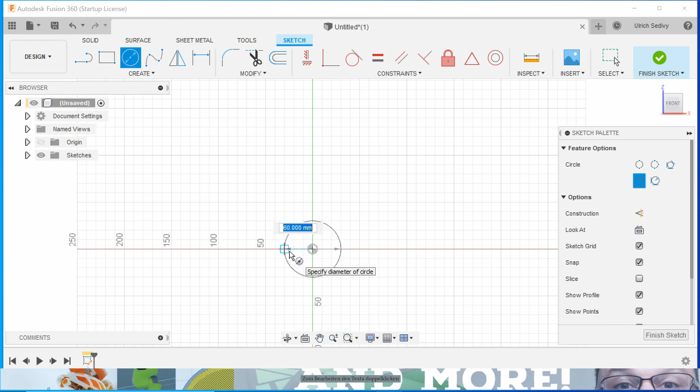So hi guys, let's start with our first step, and that will be to create a movable axis with a snap connection. For this we're gonna start with a sketch, and we just need a circle, and let's make it 50 millimeters in diameter. And that's all.

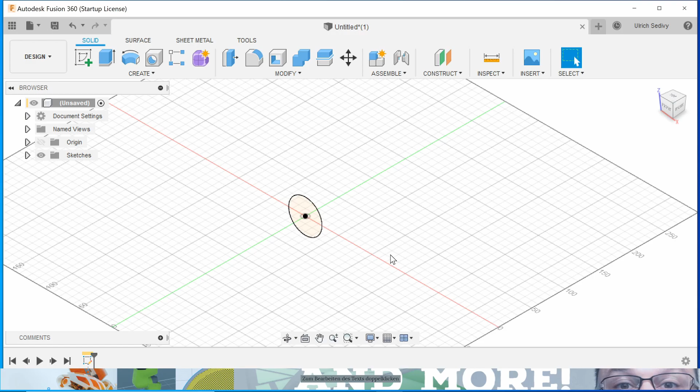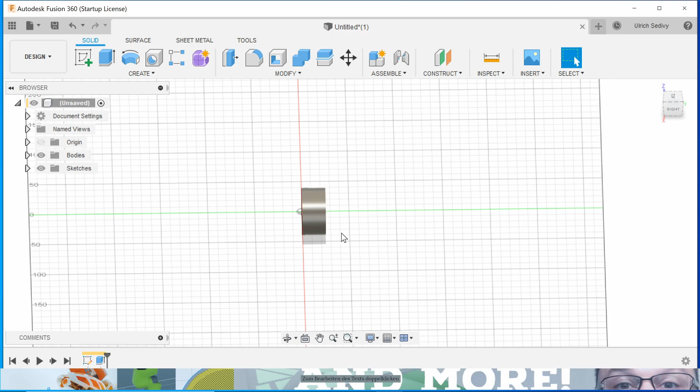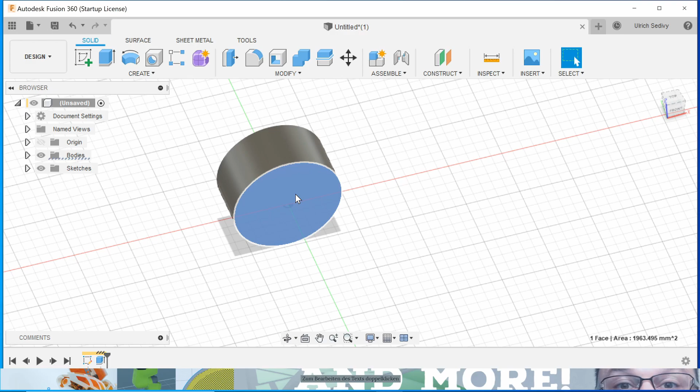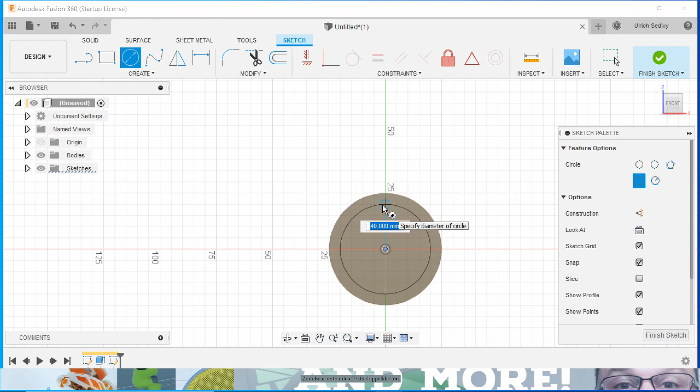And then we're gonna repeat working on this side and create another sketch, which will be also a circle, and I would say, yeah, we have like 5 millimeters, make it 40.

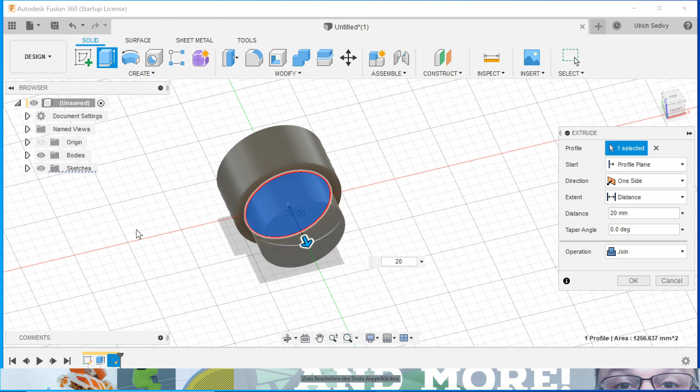Finish. And then we're gonna extrude this one, not to 25, I would say to 22. Let's do 20. Press OK. And then we have 25, so we have 45.

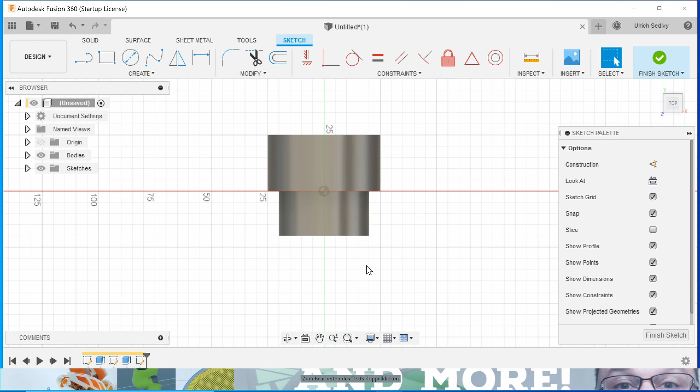So we're gonna do the next sketch in this perspective, and we need a hookup for the snap connection. Let's check. We're probably gonna need like 3 millimeters, and then we're gonna have 30 degrees for the snap. It's kind of a best practice.

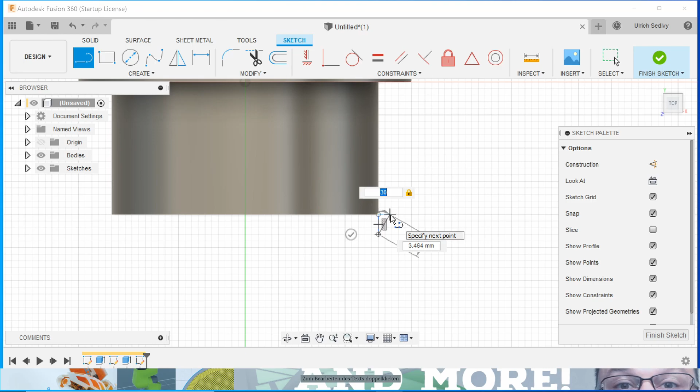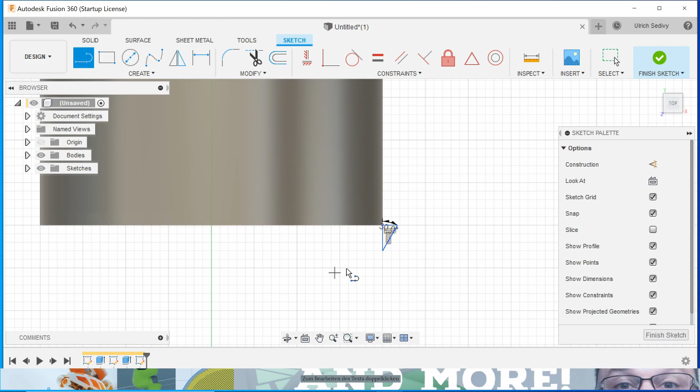Let's check the size. Looks not so bad. So in general we have to go back about triple the size. So if we have 3 millimeters length, we're gonna go back 10 millimeters. And let's zoom a little bit out, and then we're gonna close the whole thing.

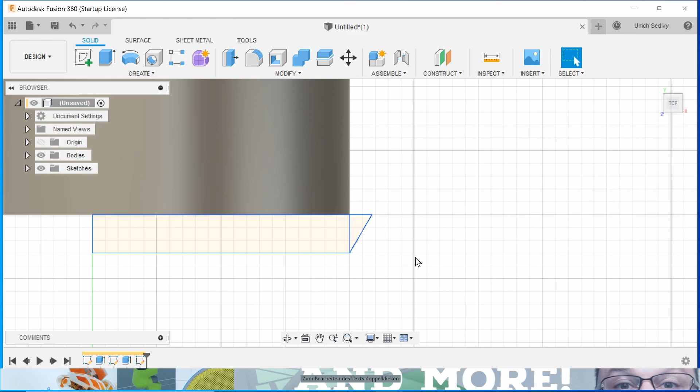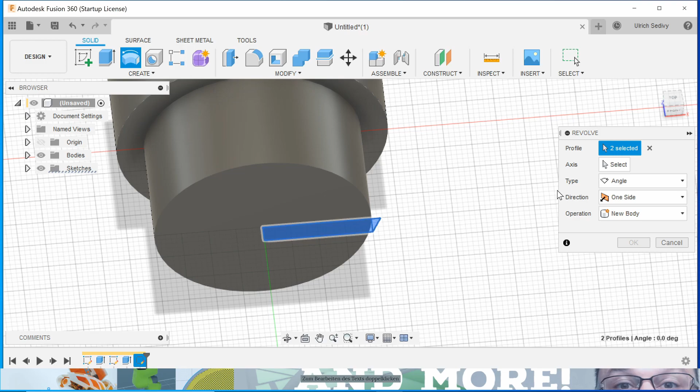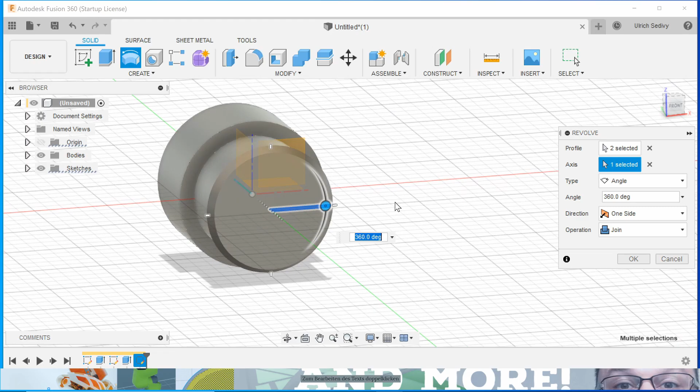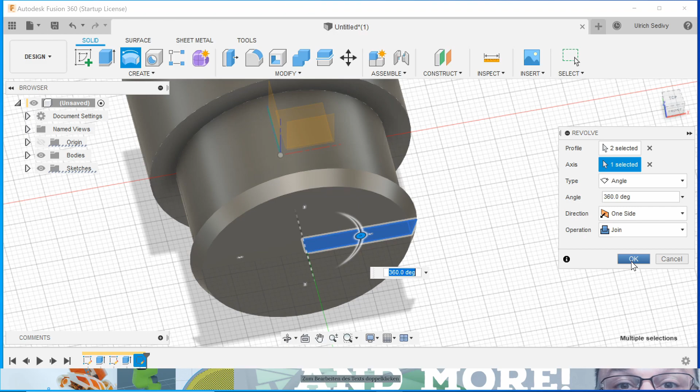And that's basically all we need to do. And yes, we want a join. Still working on one side. Confirm, and there we are. Okay. We have the hookup for the snap connection. Check.

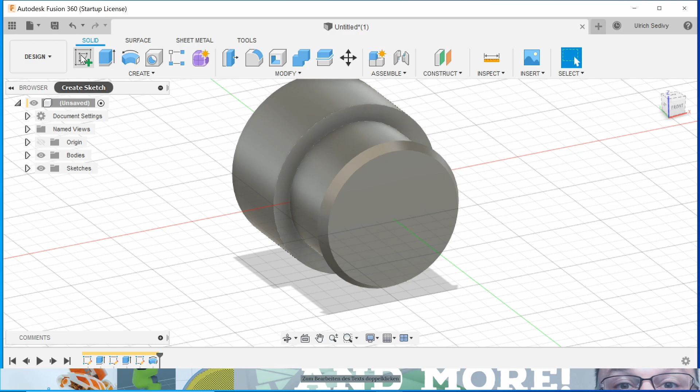Next thing would be that we have to do the cutouts from here. We can already create the shape, but we're not gonna do the cutout yet. The reason is we want to create the opposite side with a technique called Boolean operation. But you're gonna see it later. So first let us create just the shapes for the cutouts.

And it will be like this. So don't be afraid. They can be not too big. It can occur that it is too small. So in general, I would say keep double the thickness of the snap hook itself. Okay, we're gonna make it like 2 millimeters. So yeah, like this.

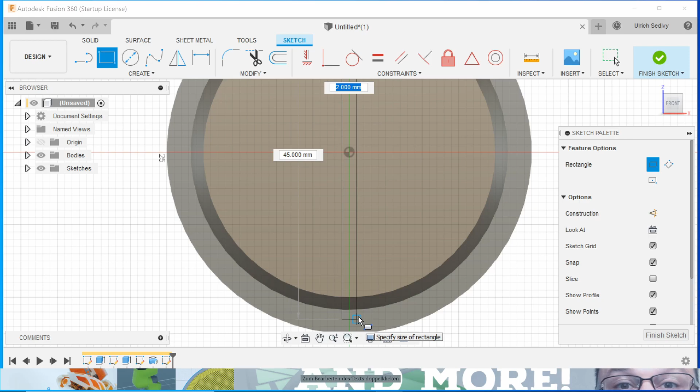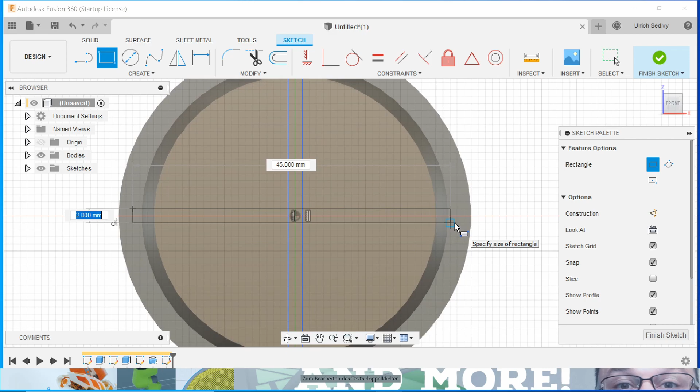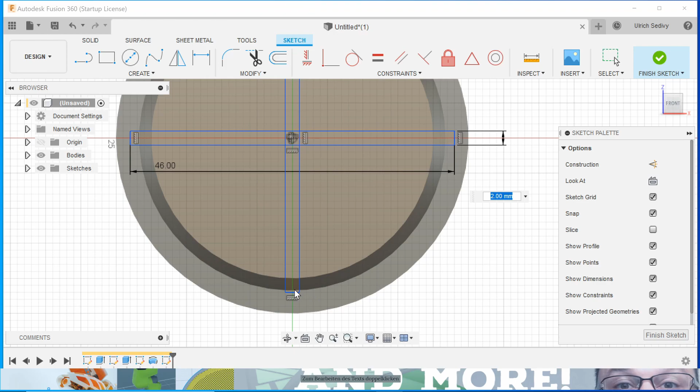Let's make it 4. Okay, wait a second, let's make the other one, and then I'm gonna show you how to change those dimensions. This is one of the tips I want to give you. So how to change a dimension? First we have to add the dimensions, what I'm currently doing. We have 2 and 46. Always have to confirm it. And the same thing here.

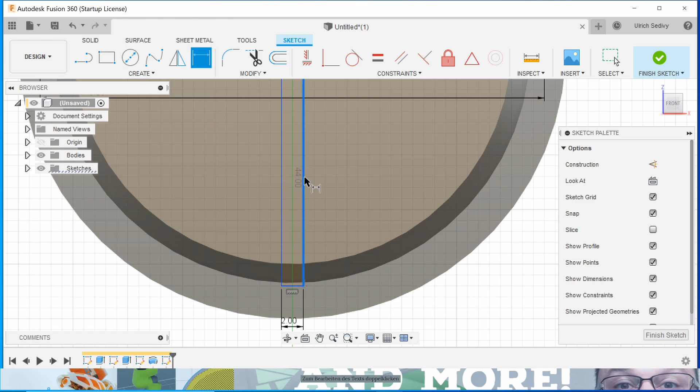So okay. We need to add the dimensions. We have also 2 millimeters, and then again this side. Oh, come on. Okay.

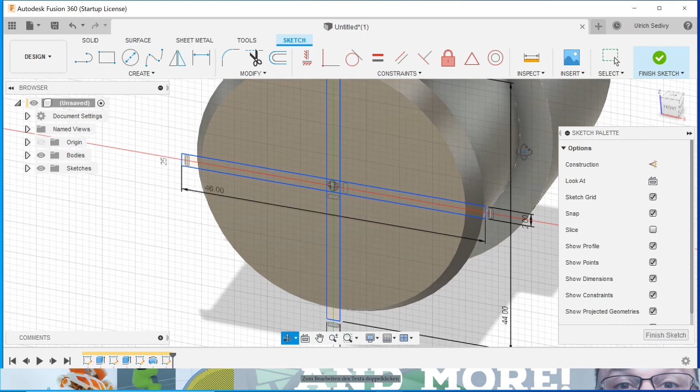By the way, if you wanna move in the current view, like I just did, just press the middle mouse button, and then you can move your view around. Currently it is the ZX plane. If you want to turn it, just do the same thing while pressing shift, and then you can turn the angle, or you can also call it the camera view.

Okay, let's go back to the front view. I was not 100% happy with the 2 millimeters. Let's change it. You can easily change it now by double clicking the value, and we're gonna change it to 4. Enter, and it will be 4. The only thing is it is not centered anymore, so we can maybe connect the whole thing and just move it.

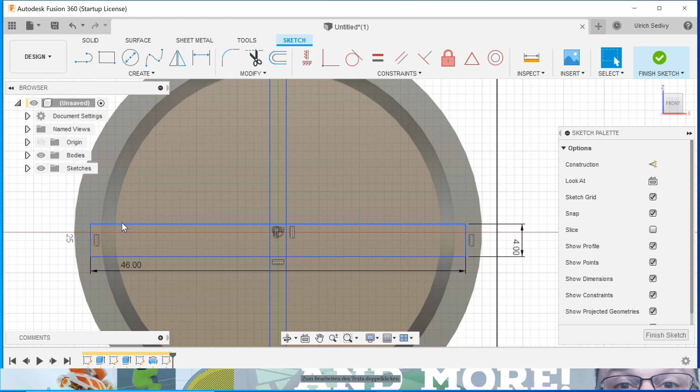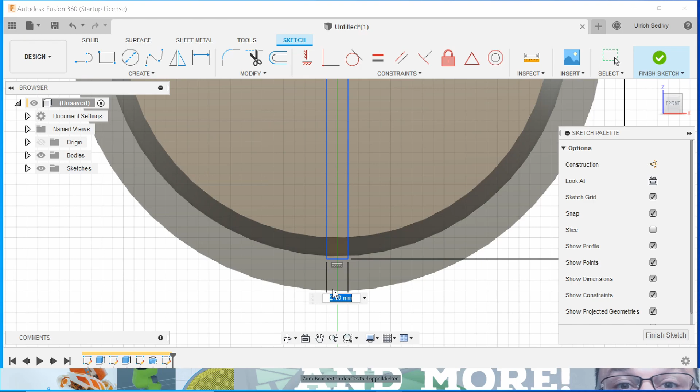It's not really snapping, but we don't need to be super precise on that. Same thing here, double click on the value, change it to 4. I can just take this and do some kind of repositioning.

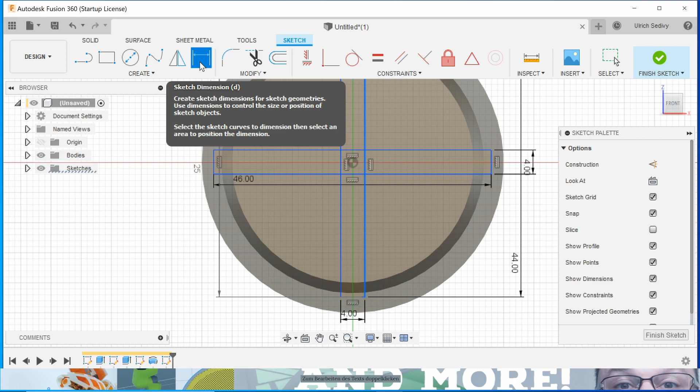If you want to have the exact position, for those of you who say, hey, dude, what is this? It's a kind of art thing. You're working with CAD programs, so you want to be precise. We can do this too, no problem with that. So let's select our dimension tool, which we can also select by pressing D. If you hover over the functions, some of the functions have a shortcut. So in this case, we have D for dimension in a sketch.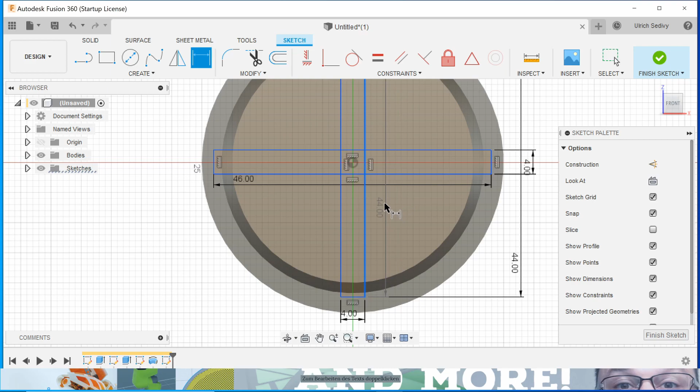Okay, so the shortcuts are also depending on what kind of layer and what kind of tab you are in. In this case we are in the sketch, so there we have the D for dimensioning. So in this case we're just gonna create a dimension from this to this edge, and we can see it was like 2 point whatever. Let's do it again. 2 point, and then we're gonna pull it out. 2.9. We're gonna change it to 2, and we're exactly in the middle.

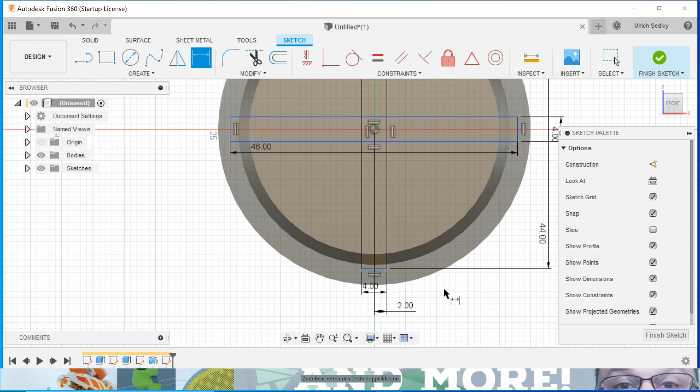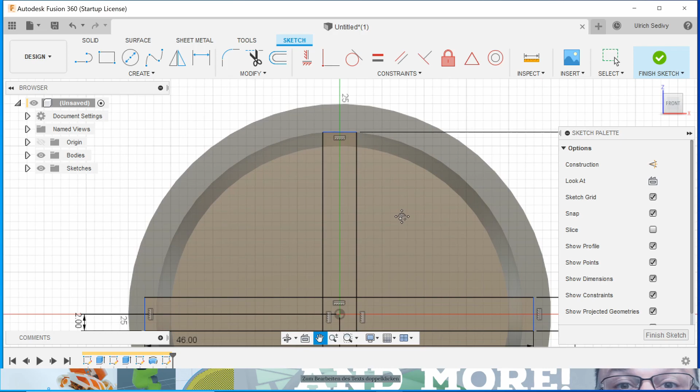We can do this again for this guy and the midpoint, and we can also change it to 2, and we are exactly in the middle. So now we are super precise. Okay, let's finish the sketch here. Yeah, it looks kinda off. We have one that is too short, 44. One is 46. Let's change this one also to 46.

And so now we can slide it just in one of the three dimensions, which has no dimensions, and this is just the z-axis. Okay, so we have all our overlaps for the cutting later, and let's finish the sketch.

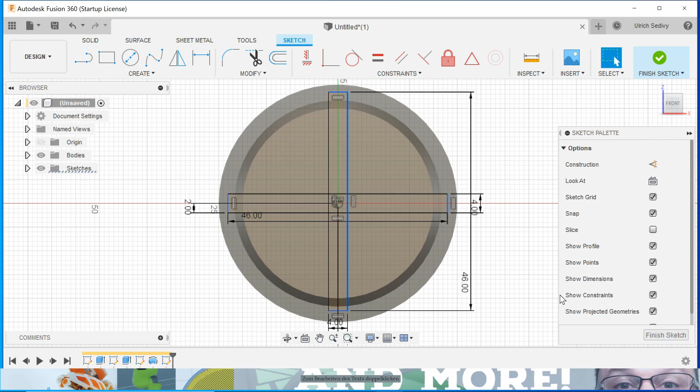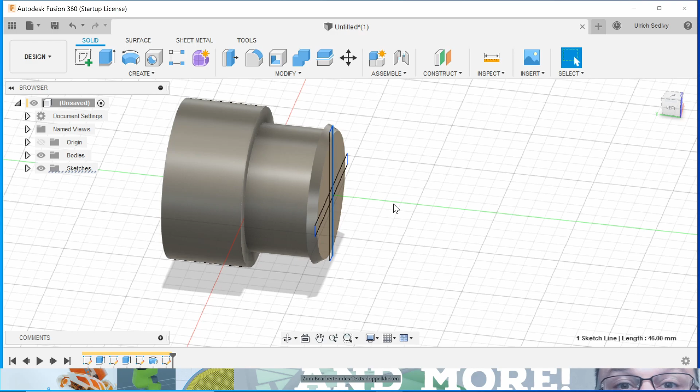Okay, so let's go back to what I said before, that we have to create the other body. So this is clearly the male side of the axis, and we're gonna need to create the female side, and we're gonna create it with this Boolean operation I told you guys about. So how can we create a Boolean operation? Good question. Next question. We need first a body.

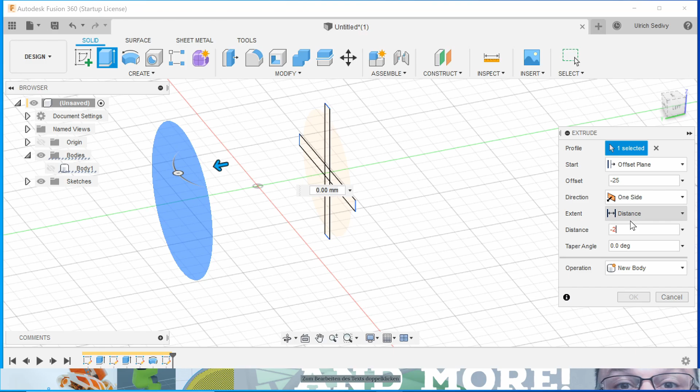So we're gonna create a body from this side, and I'm just opening the bodies so you can see we're creating another one, and I need to hide this guy. So I'm gonna do an extrusion from a different plane, like an offset plane, and we already know it is -25, and we're gonna extrude to -2, and there we have the opposite side.

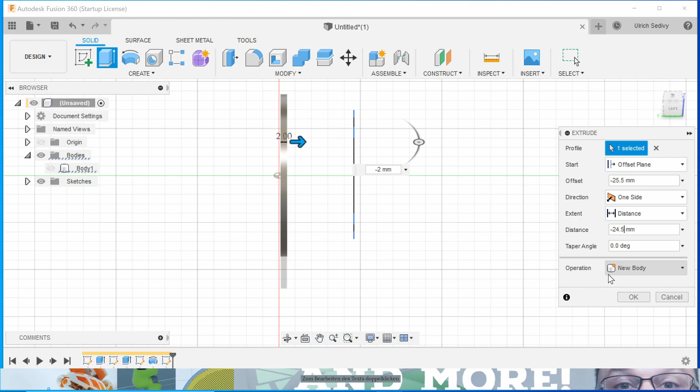The only thing I would add is a little bit of space in between the axes. So we're gonna add 0.5 on this side and make this side 0.5 smaller. So we are keeping the 50 millimeters in complete dimension of this axis. Okay.

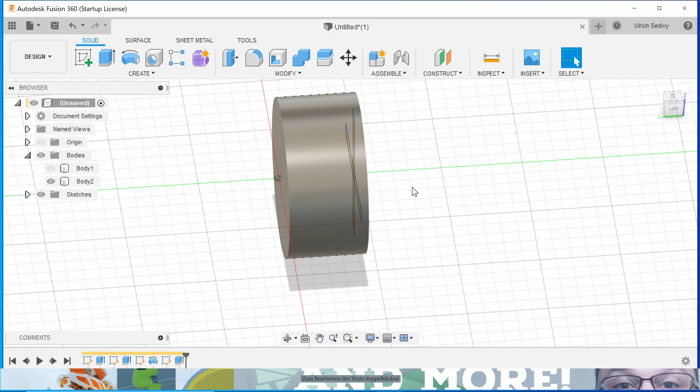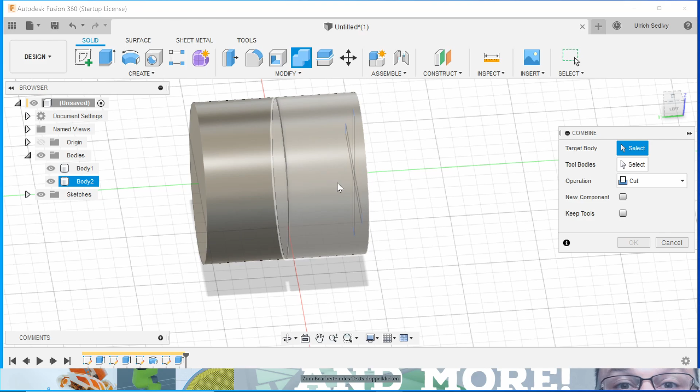So now we have the counterpart, or you can also call it the female part of the movable axis, and we need to do the Boolean operation. It is called combine, but we are not doing a combination. We're gonna do a cut, and this will be the object we want to cut. So this is the target body, and then we need a tool body, which is this one.

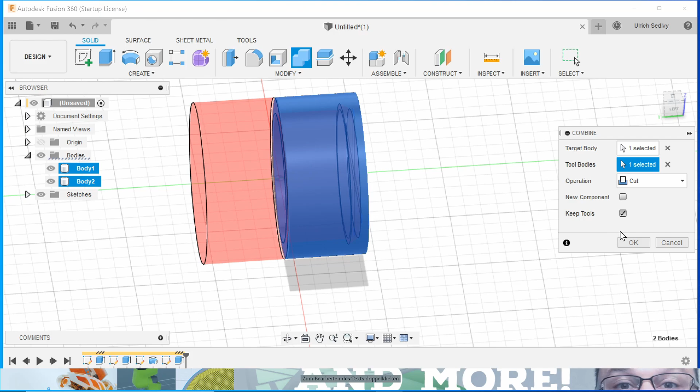Very important, if we just confirm it now, it will eradicate our first body. So we need to keep the tool body. If you want to keep both bodies, you can create a new component, but this is not what I want to do now. So just confirm it. And what happened? We're going to check it. So second body. Obviously it didn't cut.

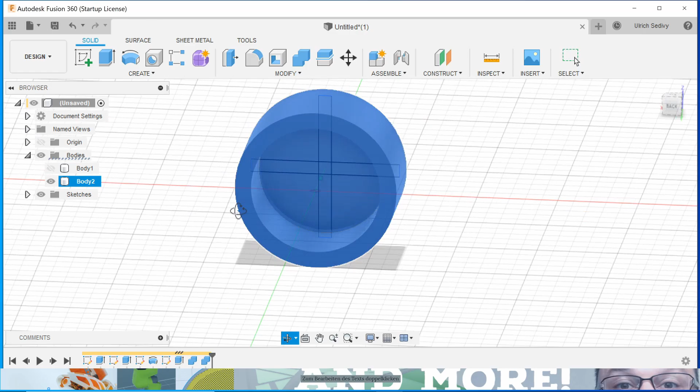So let's do it again. Select the tool body, make a cut and keep the tool. So let's hide this body and we should see it, yeah. It was done before too. Sometimes you don't see it.

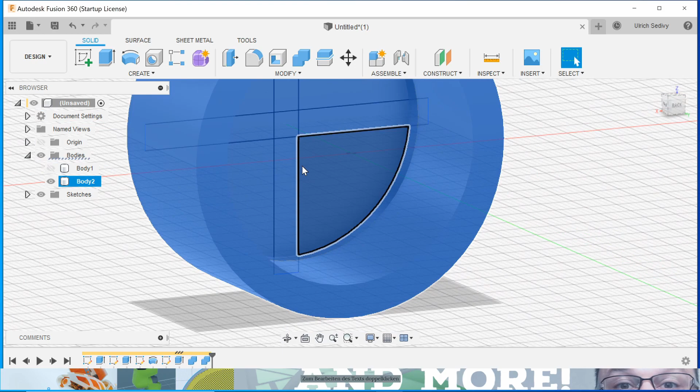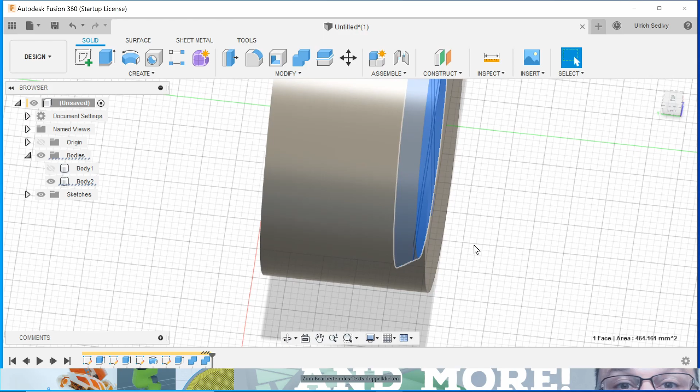So the reason why we did not do the whole through cut was that we want to have a round shape here, a complete round curve, which is now selected inside. You can see it. It is the whole shape, and now we can turn to basically every angle without having issues. Okay, so let's swap to this one, and we finally need to cut through.

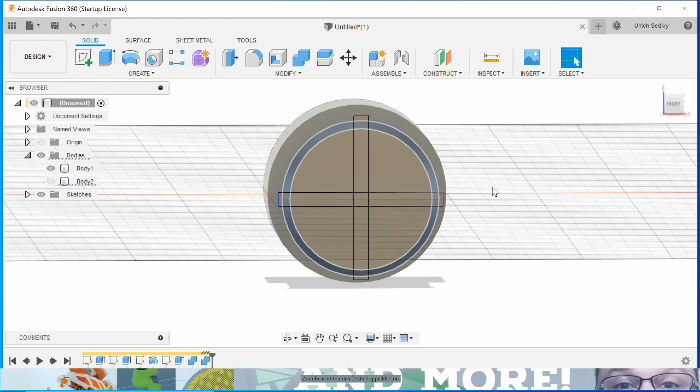The other thing which is missing is that we need another circle on this sketch, because we're gonna cut everything through if we select this, and this is not what we want to do, and otherwise this whole thing will be too big. So

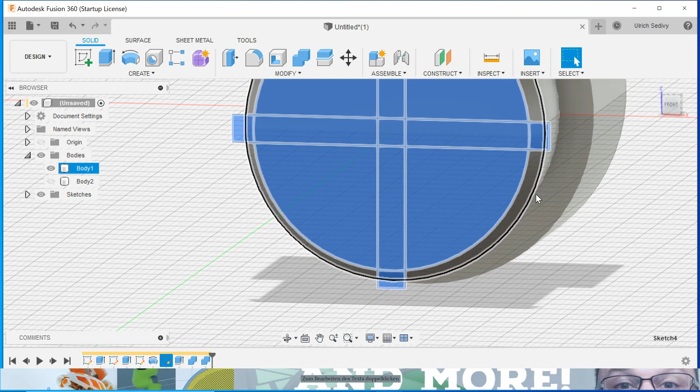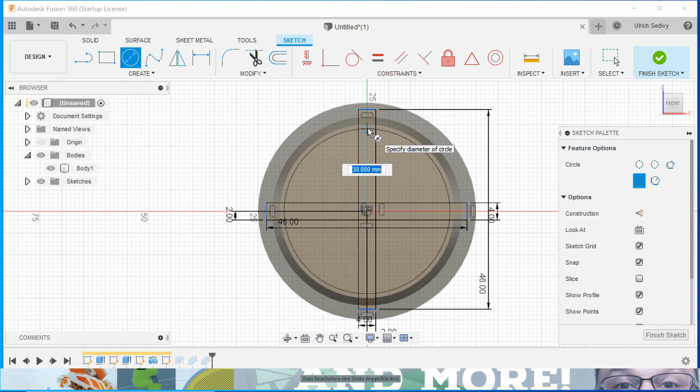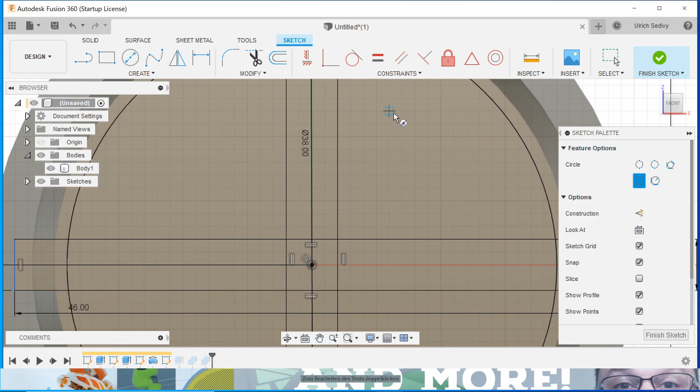let's edit this sketch and just add a circle with the dimension, let's say something like this, 34, what is it, 40, so 38 was looking good, 38. You can just type it in, 38, and we automatically have the dimension in this case.

Okay, now we have everything to do the cutout, and that's the right time to do this cutout. And how we do it: pressing E again, select all the stuff we want to cut through.

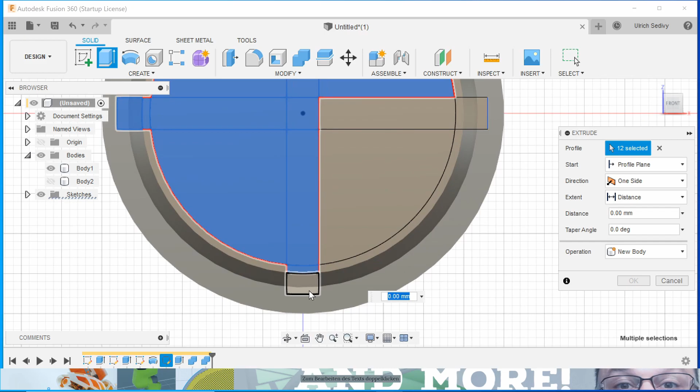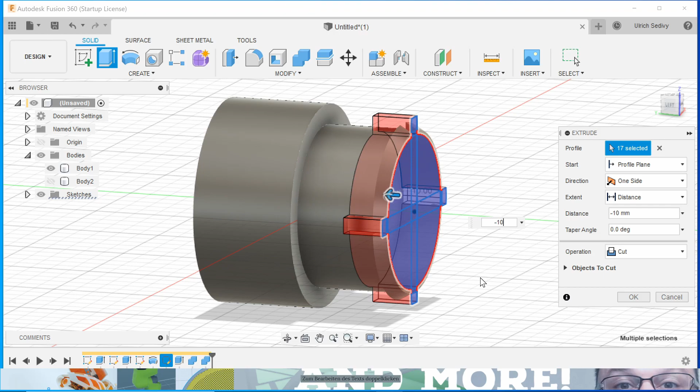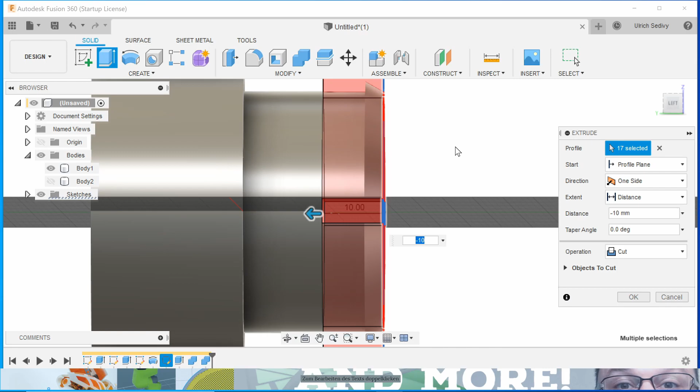Okay, everything is selected, and let's do just what we said, -10, and look for it, something like this. As we said, it should be enough, like triple size of it. Okay, you're gonna be fine.

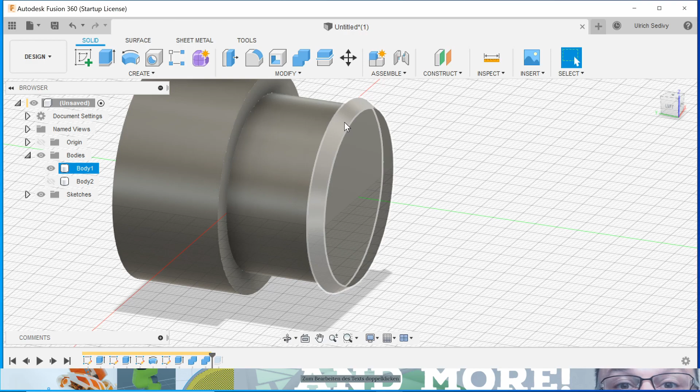Let's go one step back. So, as you can see, I always love to work with this timeline, because in case you forgot something, you can just switch back and edit. So I'm gonna edit, I call it a beveled curve. I want to bevel this curve and the other curve too, because this will be too tiny and risky to break.

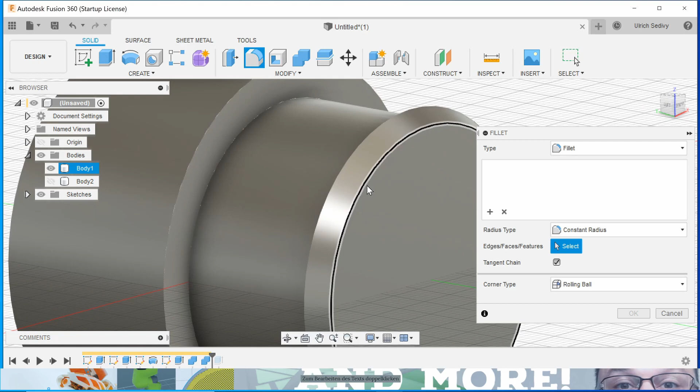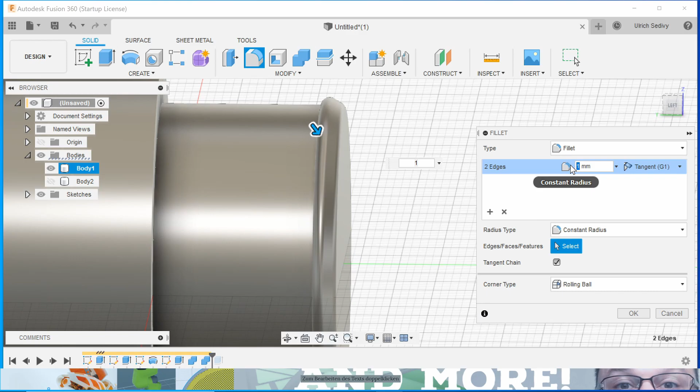So for this we're gonna select the fillet tool for beveling edges. We can select both and just put in 1mm. What we got now? So we got something like this. I would say 0.5 is the right one we are looking for. That's okay. Let's do this.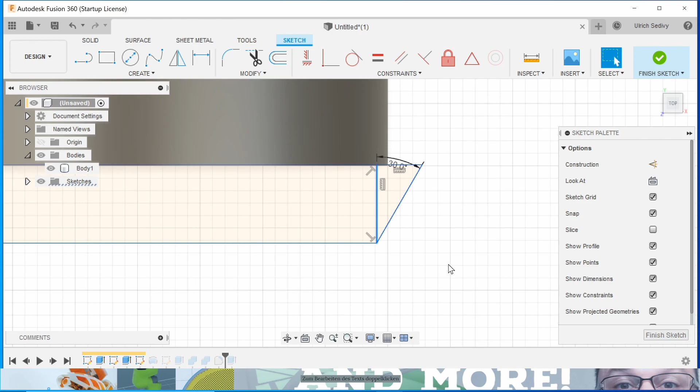And now we can do a small hack. We're gonna just move this guy a little bit and make it a bit smaller. Should be enough to fit it in, like a millimeter. Something like this. That should be fine. Okay. And put our timeline back to the cut, and we have all our cuts. That looks good.

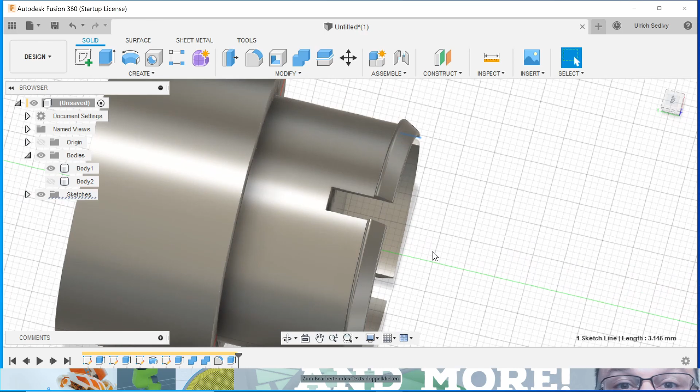So the next step is I'm gonna print both parts and show you the result. And when the result is satisfying, we're gonna go on and put those axes in maybe a robot model, or if you guys want to create the geometry of a robot model with me, then we can put it also in this.

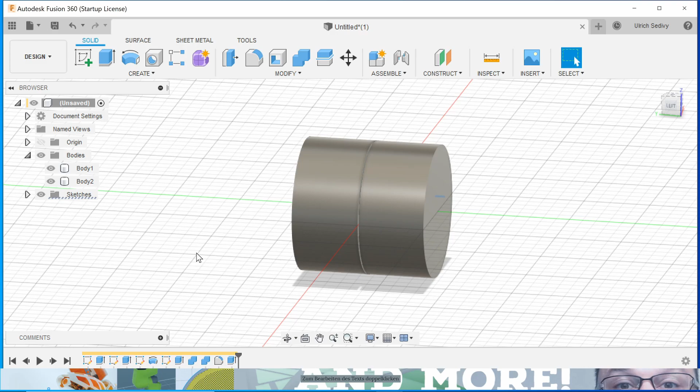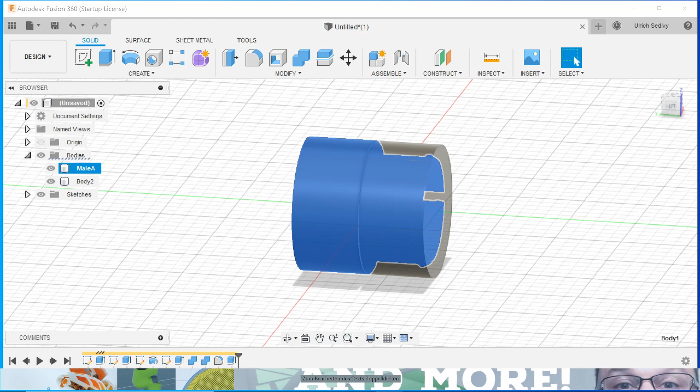At the end, I want to give you a last tip, which is name your parts, components, or also projects. So in this case, we're gonna select just our body, and this is gonna be male A for axis, and the other one male and female axis. So we have dimensions, and another very important thing is name your stuff. Think about the naming. Also here, but this is coming when you're gonna save it.

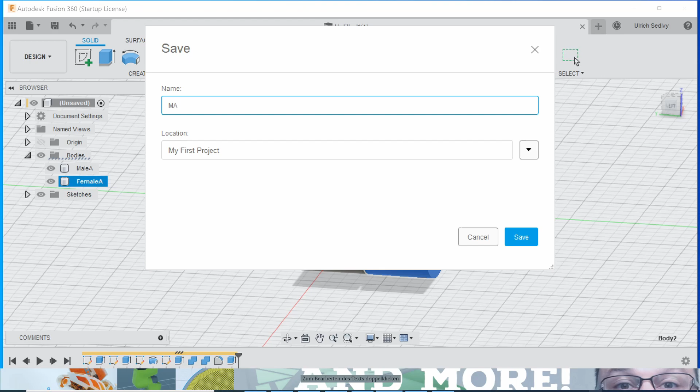So I'm gonna save it now, click on save, and then we're gonna call it, what is it? It is a moving axis, MA, and we're gonna version it V1, MA V1, and save it.

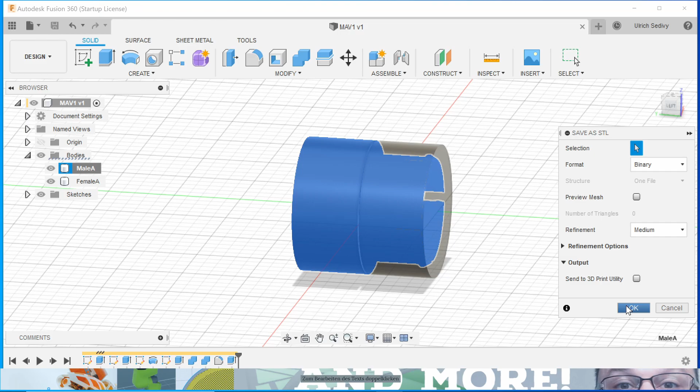If you want to export it for printing, just go over the bodies, hover over, right click, and save it as STL. And we can leave all the settings on properties like they are, and just confirm them. And the same thing for the female side. Just save.

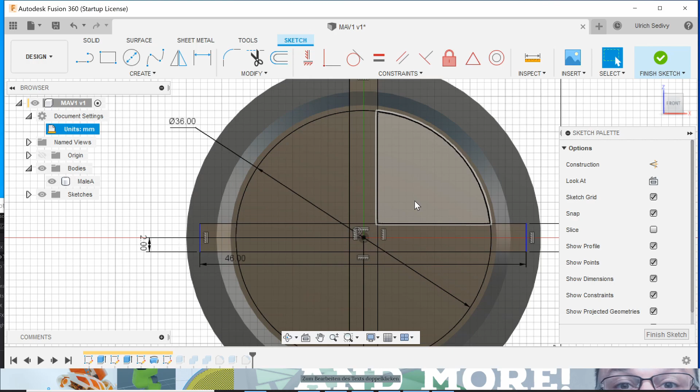And so guys, a short update about small improvements I did before I start to print it. The first one is that I made the inner circle a little bit smaller. I changed it from 38 to 36, just to be sure that we have enough material for the snap fingers. The next thing was that I added a little bit of beveling inside. This is kind of important to prevent them from breaking.

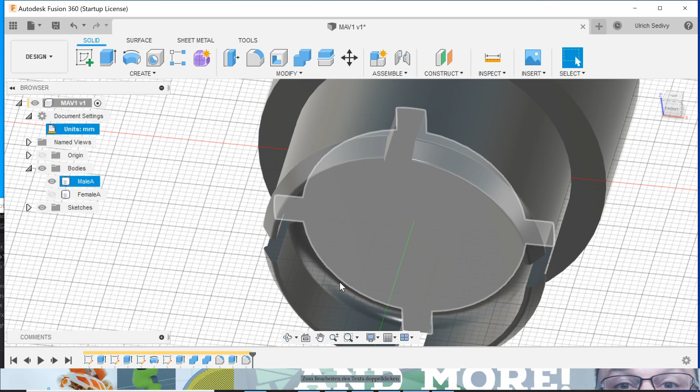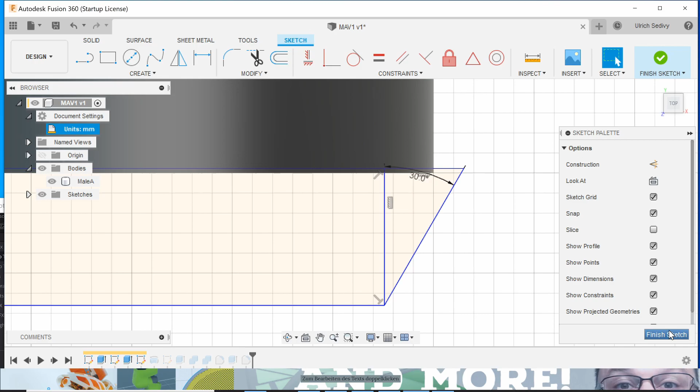And the last step was that I moved our hookup a little bit more to the middle, so as you can see here, it's just about a millimeter which is exposed to the outside edge. And if we see here, it makes the line cleaner.

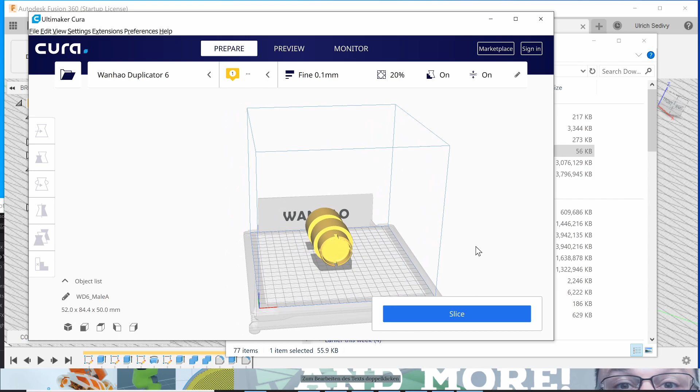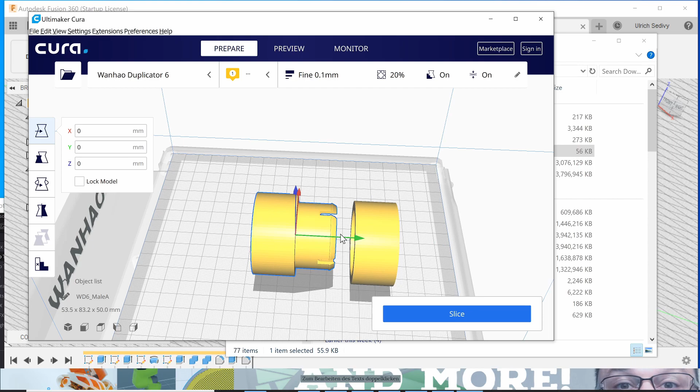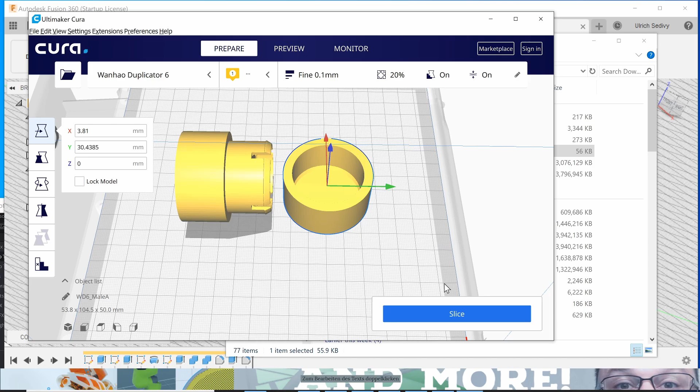And so here we are in Cura for preparing the printing, and just drag and drop it into Cura. And so yeah, let's print it directly in this direction. And just turn this one. And we are ready for printing. That's gonna be exciting. I'm gonna show you the result later.